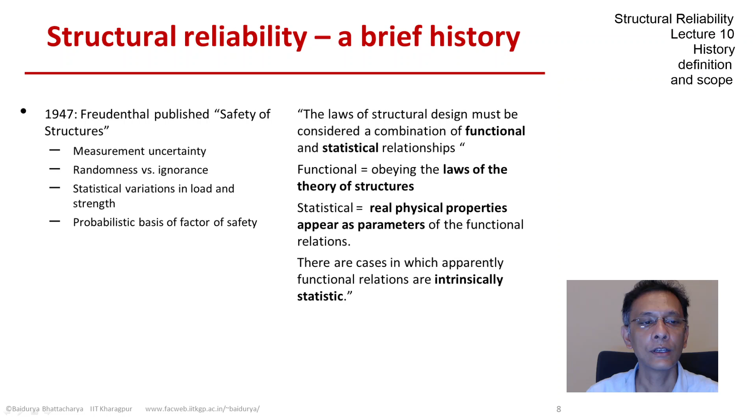If we continue reading that paper, then Professor Freudenthal clearly makes a distinction between uncertainty, which we now understand as statistical variations, versus ignorance, which we now understand as epistemic uncertainty, modeling uncertainty, etc.

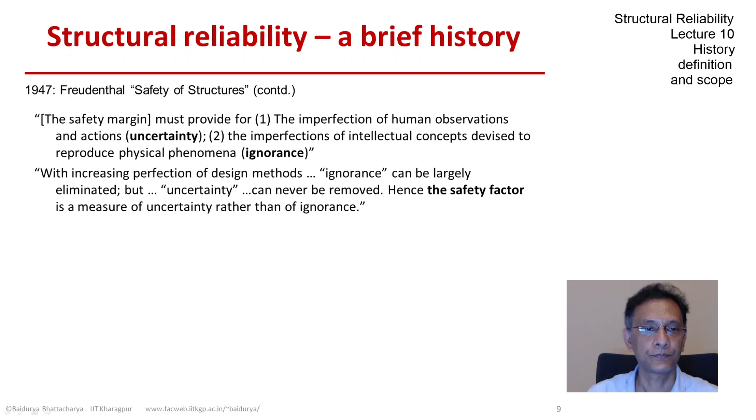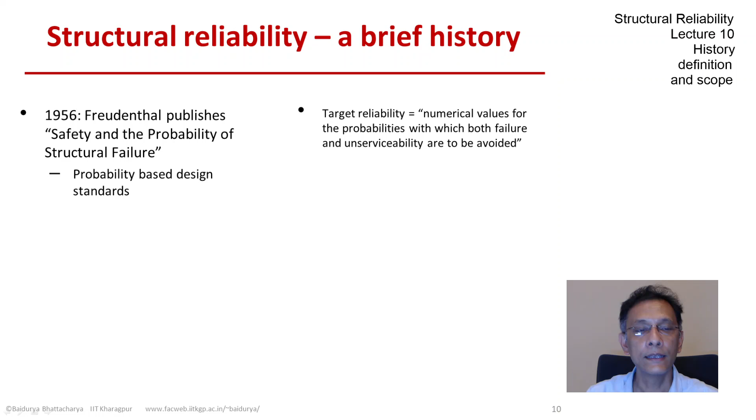A few years later, Freudenthal published in 1956 his paper, Safety and the Probability of Structural Failure, in which he developed these concepts in far greater detail. And we see the concepts of probability-based design standards, the seed of that idea, and particularly his understanding on target reliability, how to enforce that target reliability in design, and how to calibrate that target reliability based on risks.

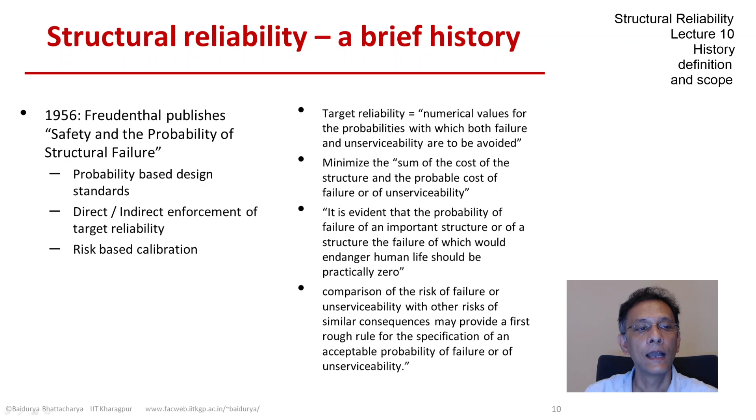And in fact, he clearly points out the relation between acceptable safety standards and the consequences of failure. The subject of structural reliability grew in the 60s and beyond. We see an emphasis on limit state design, natural hazards, data collection and modeling, and the load capacity formulation that we do today.

In the 1970s, there was emphasis on development of reliability-based codes, which we now call the first generation design standards. A focus on progressive collapse led by the Ronan Point disaster, the development of the first order reliability methods or FORM, which we'll study later in this course, and a continued investigation on acceptable safety or target reliability.

There were emphasis on systems reliability, variance reduction, and development of time-dependent reliability concepts from a capacity demand point of view, which again we'll look at later in this course. That was in the 1980s.

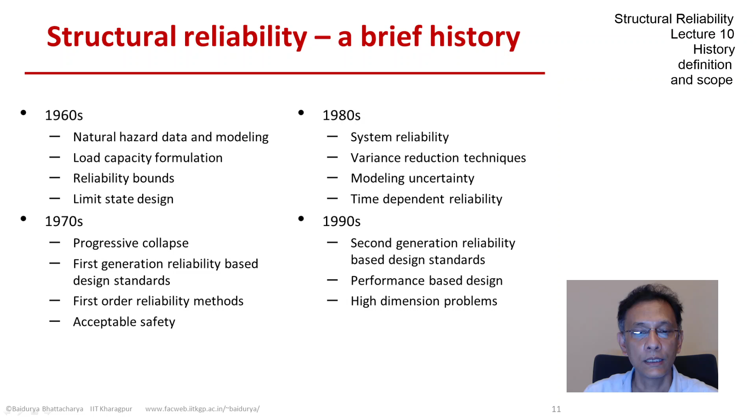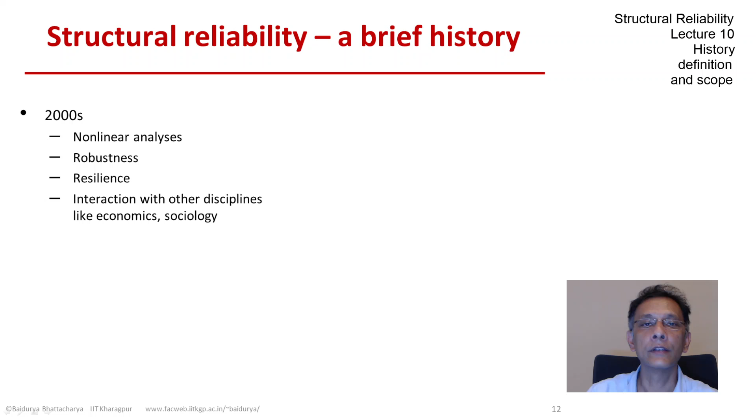The 1990s saw refinement of the design standards, the introduction of the concepts of performance-based design, and a look at high-dimension problems in reliability. In this century, we see the subject evolving into nonlinear analysis, the concepts of robustness, resilience, and we see more and more interdisciplinary work taking place between structural safety and economics and sociology.